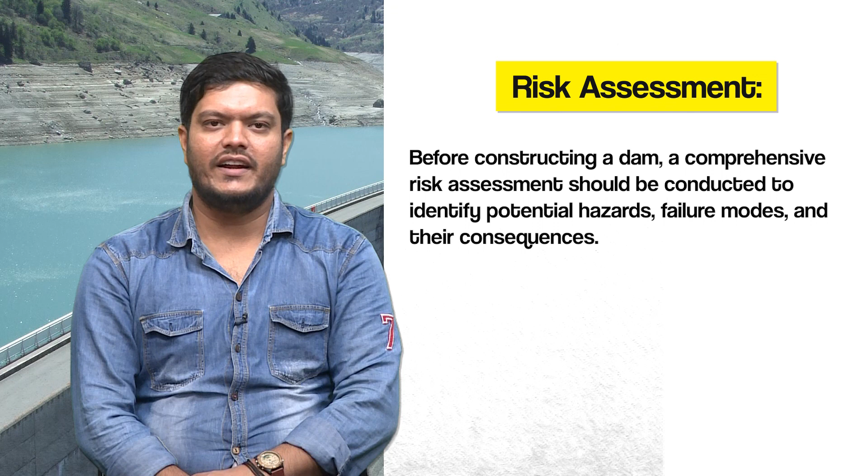Safety in dams: Risk assessment. Before constructing a dam, a comprehensive risk assessment should be conducted to identify potential hazards, failure modes, and their consequences. Risk assessment in dams is a systematic process that evaluates potential hazards, identifies possible failure modes, and assesses the associated risk to ensure the safety and integrity of the dam. It involves evaluating various factors to make informed decisions regarding dam design, operation, and emergency preparedness.

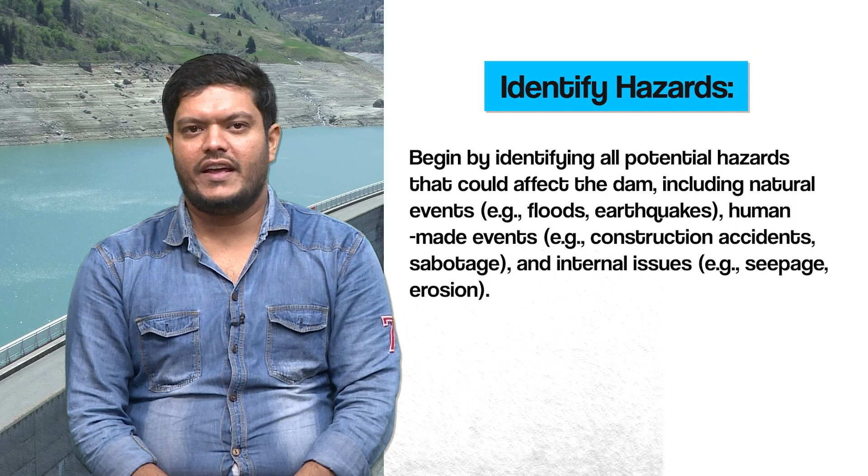Here are the key steps involved in risk assessment for dams. Identify hazards: begin by identifying all potential hazards that could affect the dam, including natural events such as floods and earthquakes, human-made events such as construction accidents or sabotage, and internal issues such as seepage or erosion.

Consequence analysis: determine the potential consequence of each identified hazard. This involves assessing the impact on human life, property, and the environment if the dam were to fail, considering factors such as downstream population, infrastructure, and ecological sensitivity.

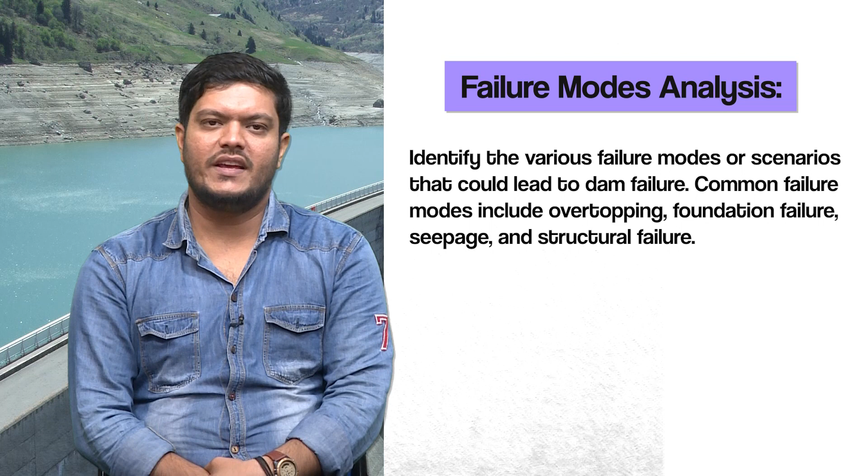Failure modes analysis: identify the various failure modes or scenarios that could lead to dam failure. Common failure modes include overtopping, foundation failure, seepage, and structural failure.

Probability assessment: evaluate the likelihood or probability of each failure mode occurring. Consider historical data, geological studies, meteorological data, and engineering analysis to estimate the probability of each hazard scenario.

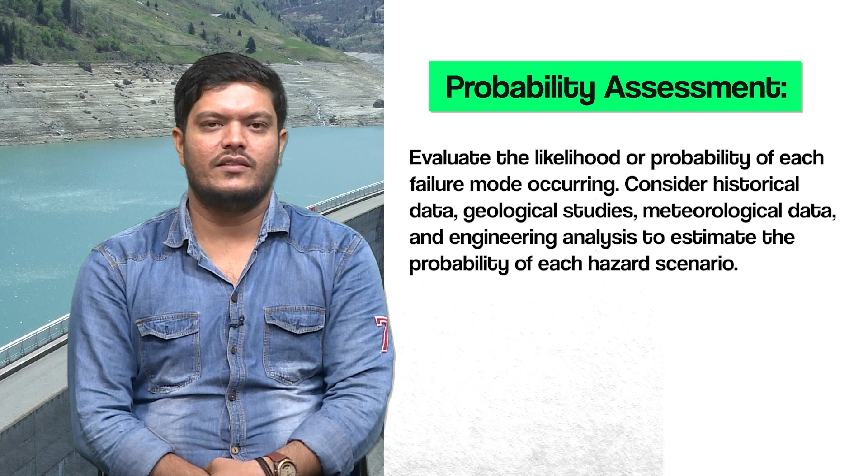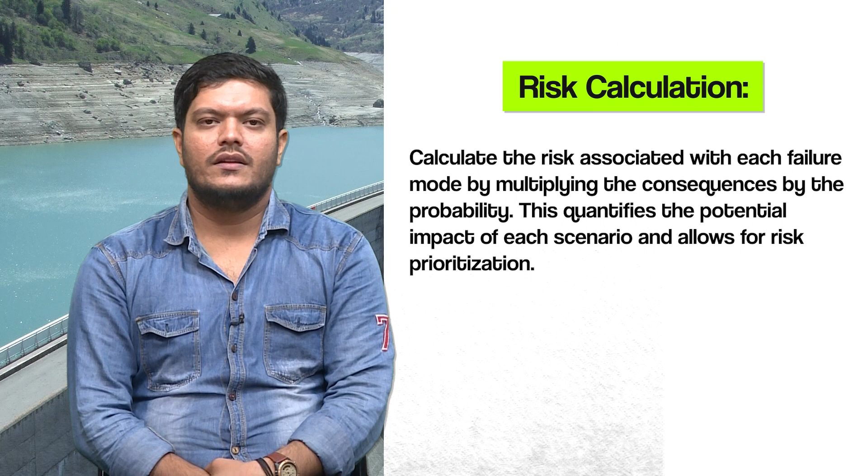Risk calculation: calculate the risk associated with each failure mode by multiplying the consequences by the probability. This quantifies the potential impact of each scenario and allows for risk prioritization.

Risk ranking: rank the failure modes based on their calculated risk levels. This helps prioritize which scenarios should be addressed first in terms of risk reduction measures.

Risk mitigation measures: develop and implement risk mitigation measures to reduce the probability of high risk scenarios and minimize their potential consequences. Mitigation measures may include dam design modifications, structural improvements, early warnings, and emergency response plans.

Emergency Action Plans (EAP): develop a comprehensive Emergency Action Plan that outlines specific actions to be taken in the event of a dam failure or high risk situation. Ensure that the EAP is well communicated to relevant authorities and the public.

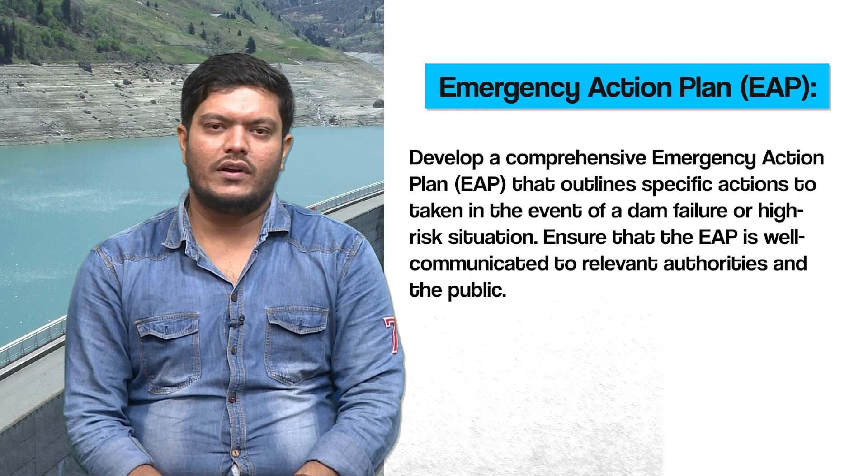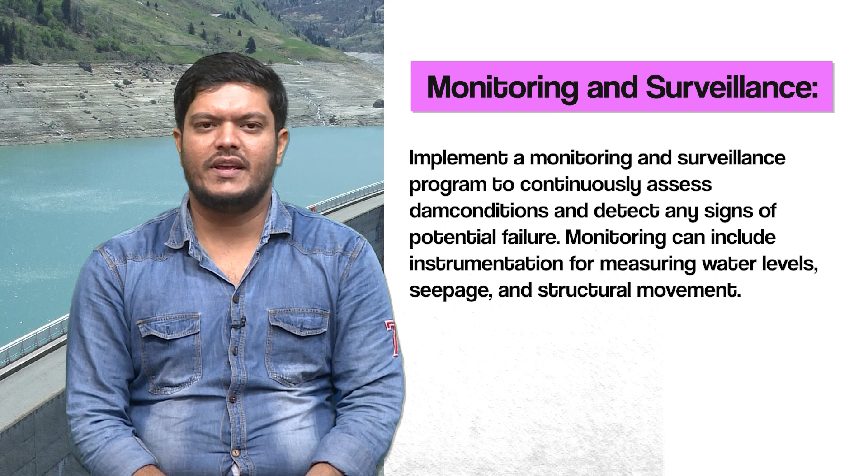Monitoring and surveillance: implement a monitoring and surveillance program to continuously assess dam condition and detect any signs of potential failure. Monitoring can include instrumentation for measuring water levels, seepage, and structural movement.

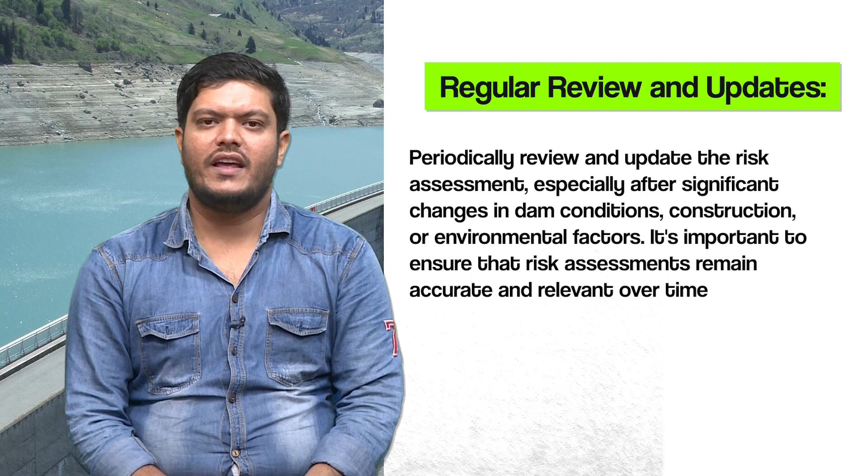Regular review and updates: periodically review and update the risk assessment, especially after significant changes in dam conditions, construction, or environmental factors. It's important to ensure that risk assessments remain accurate and relevant over time.

Community engagement: engage with the local community and stakeholders to keep them informed about dam safety measures, potential risks, and emergency response procedures. Public awareness is crucial for a coordinated response in case of emergencies.

Regulatory compliance: ensure that the dam complies with all relevant dam safety regulations and guidelines established by government agencies.

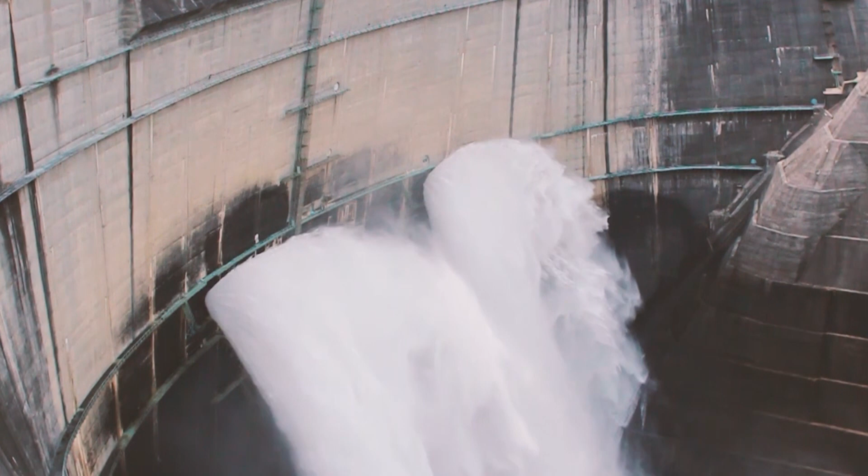Risk assessment in dams is an ongoing process that requires collaboration between dam owners, engineers, geologists, hydrologists, and emergency management agencies. By identifying and mitigating potential risks, dam safety can be enhanced, reducing the likelihood of catastrophic dam failures and protecting downstream communities and the environment.

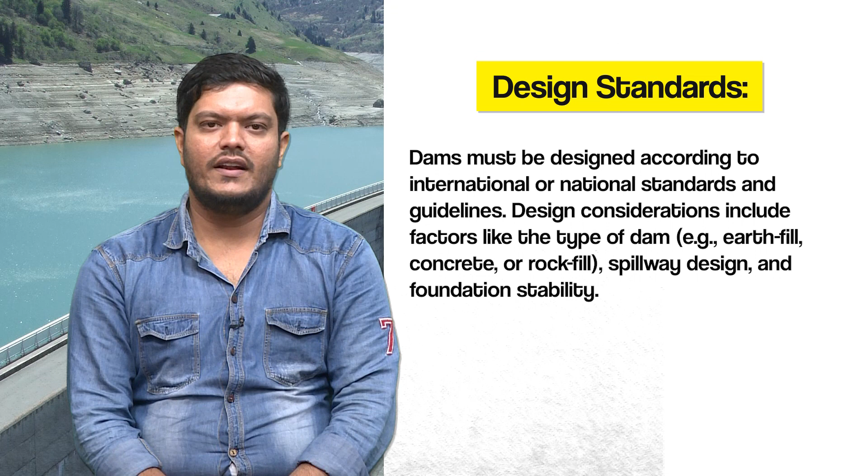Design standards: dams must be designed according to international or national standards and guidelines. Design considerations include factors like the type of dam - earth fill, concrete or rock fill - spillway design, and foundation stability. Design standards for dams are crucial to ensure the safe and reliable construction of these critical infrastructure elements.

These standards provide guidelines, specifications, and criteria that engineers and dam designers must adhere to when planning, designing, and constructing dams. Below are some of the key standards and considerations for dams.

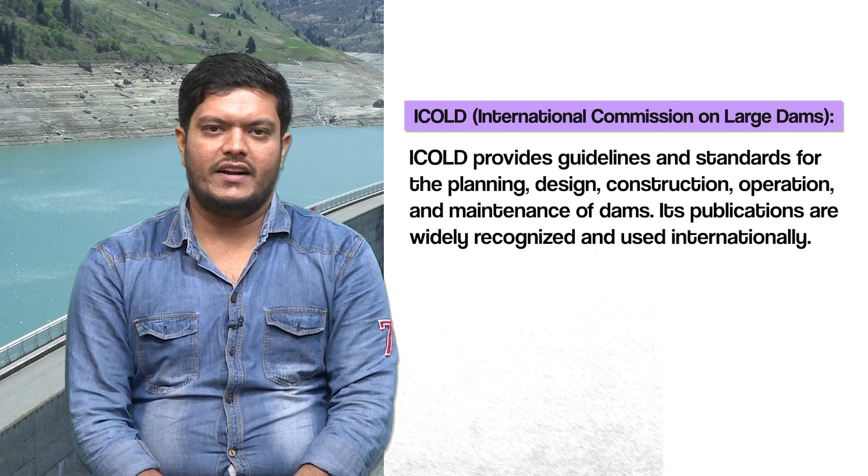International guidelines and standards: ICOLD, the International Commission on Large Dams, provides guidelines and standards for the planning, designing, construction, operation, and maintenance of dams. Its publications are widely recognized and used internationally.

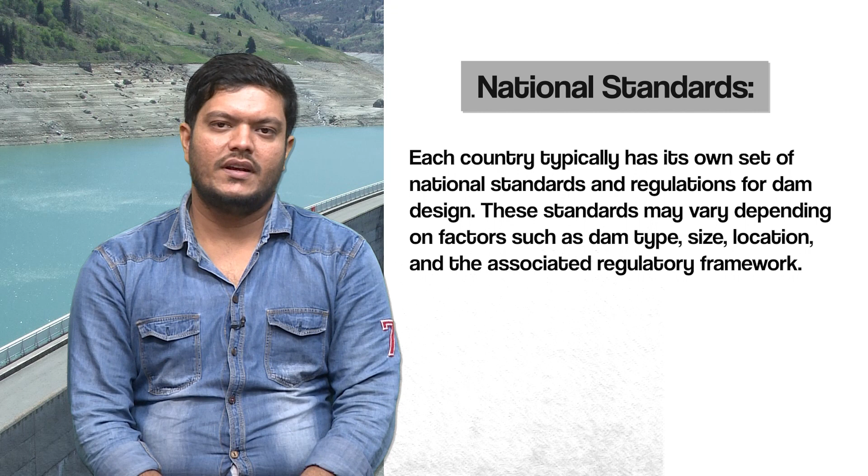National standards: each country typically has its own set of national standards and regulations for dam designs. These standards may vary depending on factors such as dam type, size, location, and the associated regulatory framework.

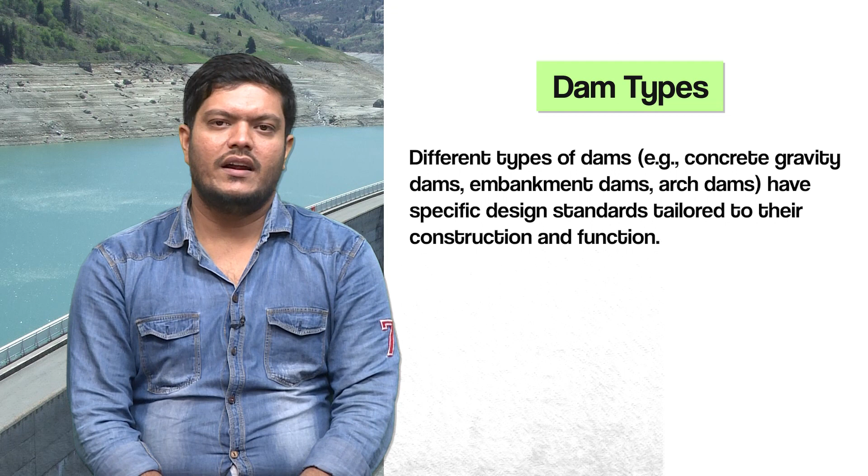Dam types. Different types of dams, for example concrete gravity dams, embankment dams, and arch dams, have specific design standards tailored to their construction and function. Next is geotechnical considerations.

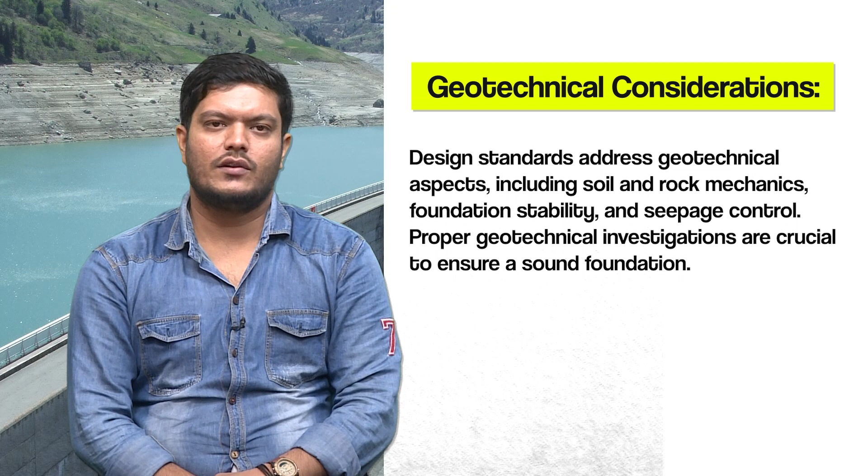Design standards address geotechnical aspects including soil and rock mechanics, foundation stability, and seepage control. Proper geotechnical investigations are crucial to ensure a sound foundation.

Hydraulic design standards cover spillway design, outlet works, and flood routing. They ensure that the dam can safely manage inflows, floods, and reservoir operations.

Structural design standards focus on the structural integrity of the dam, including factors like materials, reinforcement, and structural safety. These standards are essential for concrete dams and other structural elements.

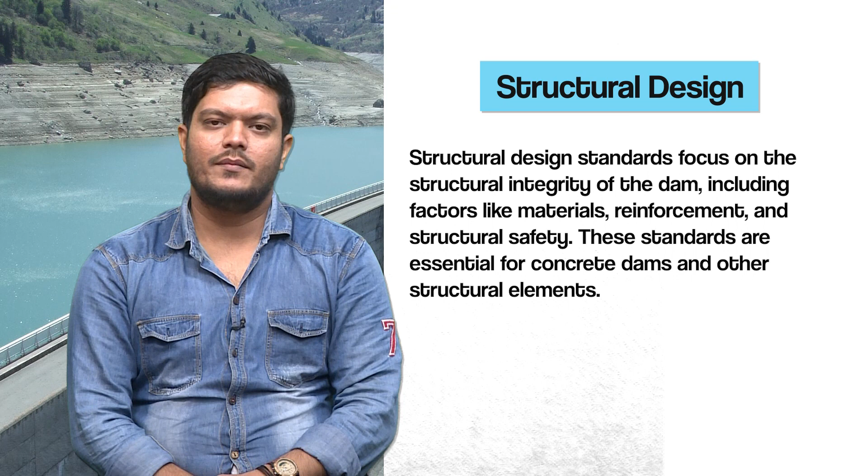Hydrological standards specify how to estimate inflows, design flood events, and determine reservoir operating rules. Accurate hydrological data is crucial for dam design.

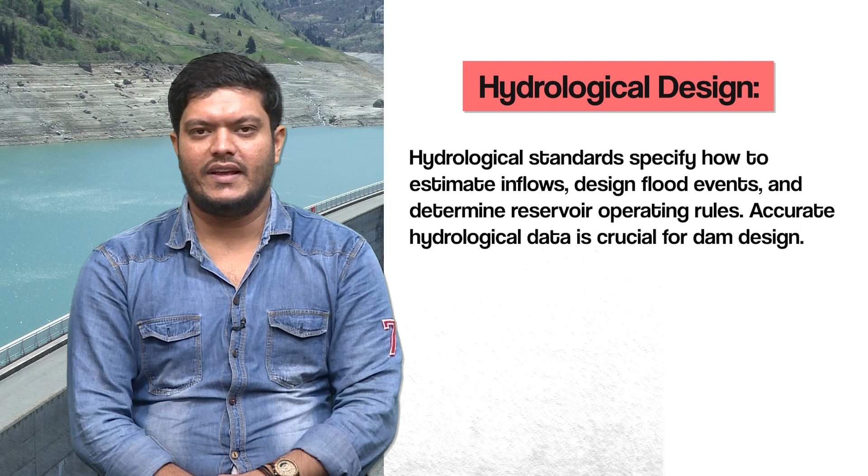Environmental considerations. Modern dam design standards also emphasize environmental aspects including fish passage, habitat preservation, and minimizing the ecological impact of the dam.

Safety factors. Design standards include safety factors to account for uncertainties in materials, construction, and loading conditions. These factors provide an additional margin of safety.

Instrumentation and monitoring. Design standards often require the installation of instrumentation to monitor dam performance continuously. This includes sensors for water level, seepage, and dam movement.

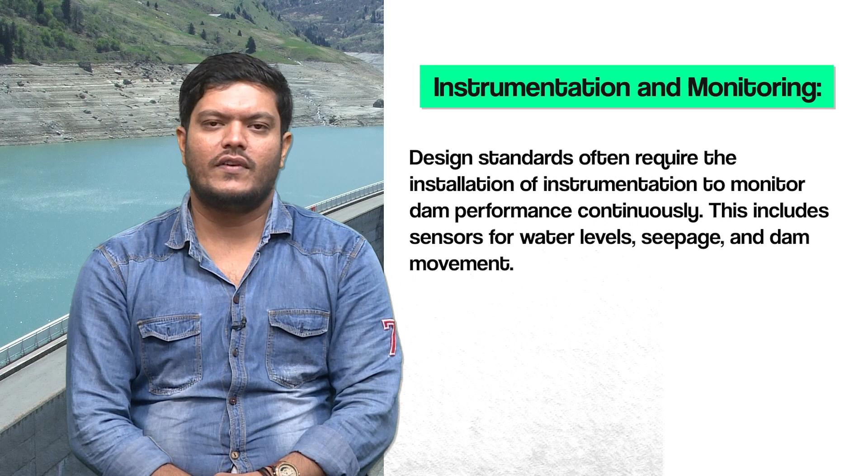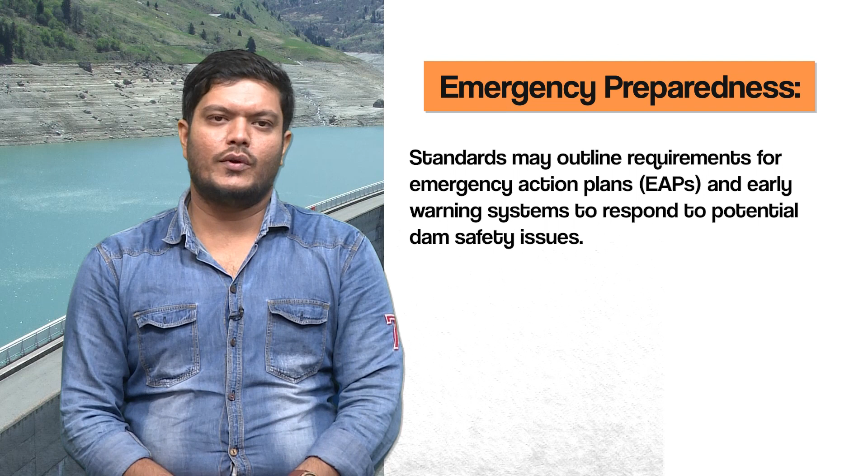Emergency preparedness. Standards may outline requirements for emergency action plans (EAPs) and early warning systems to respond to potential dam safety issues.

Construction specification. Construction standards and specifications define the methods and quality control procedures that must be followed during dam construction.

Operation and maintenance. Design standards may include guidelines for ongoing dam operations and maintenance to ensure the safety and integrity of the structure throughout its lifespan.

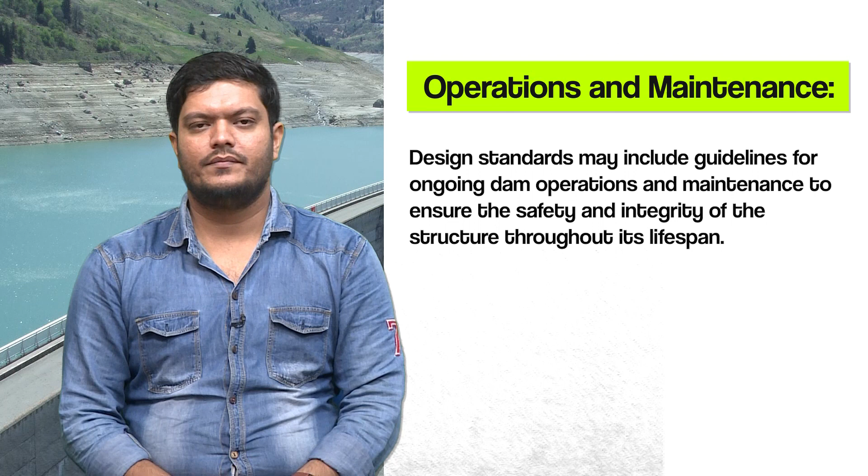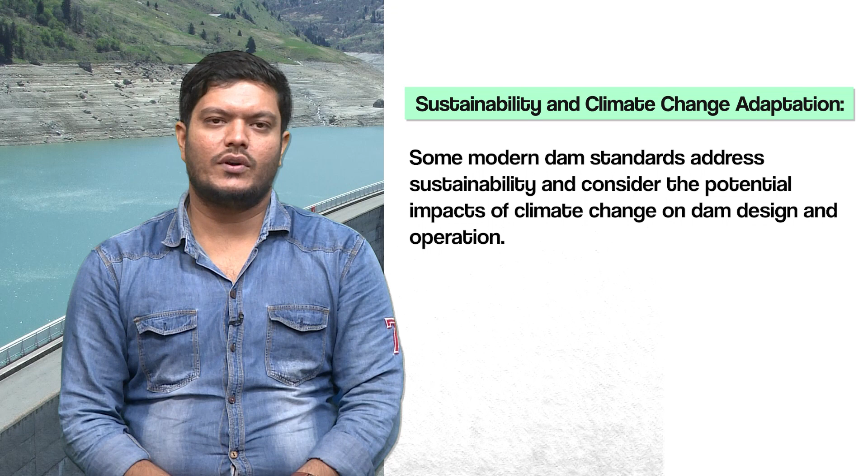Sustainability and climate change adaptations. Some modern dam standards address sustainability and consider the potential impacts of climate change on dam design and operation.

Engineers and dam designers must stay up to date with the latest design standards and guidelines, as they may evolve over time to incorporate new technologies, research findings, and safety measures.

Compliance with these standards is essential to ensure the safety and long-term functionality of dams, as well as to meet regulatory requirements and protect downstream communities and the environment.

Emergency preparedness. A well-defined emergency action plan (EAP) should be in place to address various failure scenarios. It should include evacuation procedures, warning systems, and communication strategies.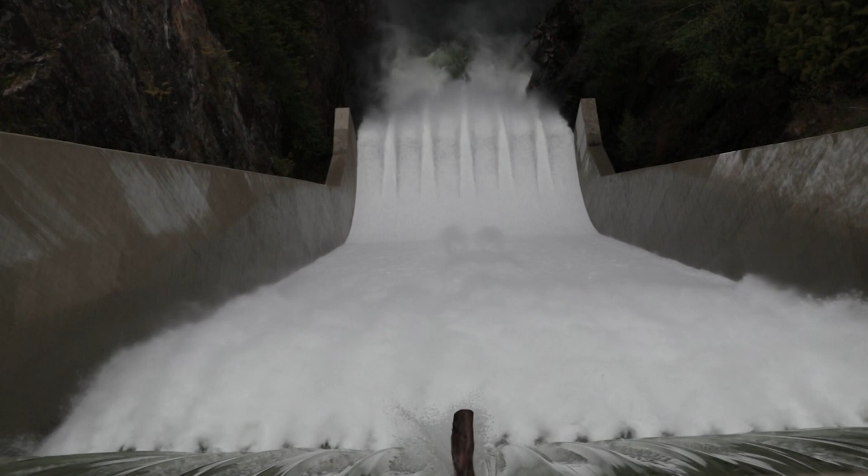Climate change adaptation in dams is a critical aspect of dam management and design. In the face of shifting climate patterns, increasing extreme weather events, and rising global temperatures, dams play a crucial role in managing water resources, mitigating floods, and providing a stable water supply.

Adapting dams to climate change is essential to ensure their continued effectiveness and safety. Here are some key considerations for climate change adaptation in dams.

Hydrological modeling. Re-evaluate hydrological models and data to incorporate climate change projections. This includes assessing potential changes in precipitation patterns, runoff, and stream flow, which can impact reservoir management and flood control.

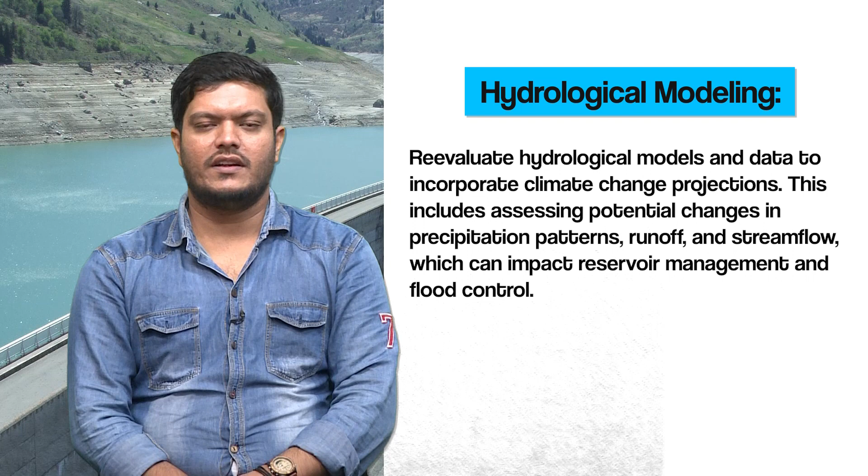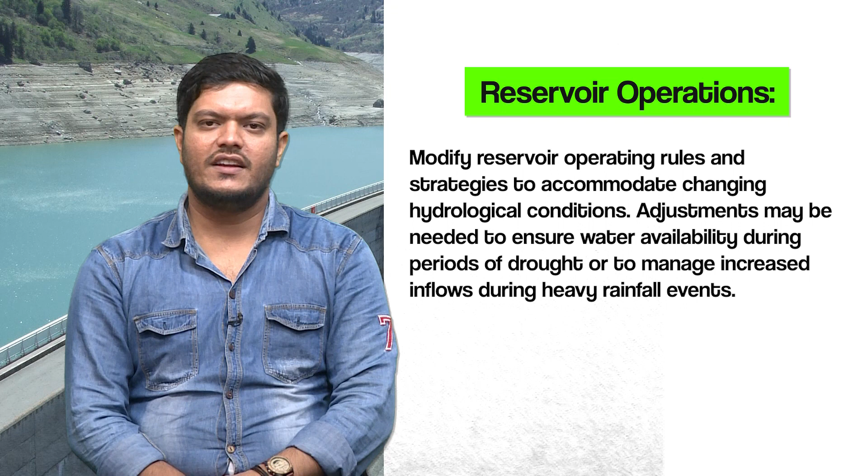Reservoir operations. Modify reservoir operating rules and strategies to accommodate changing hydrological conditions. Adjustments may be needed to ensure water availability during periods of drought or to manage increased inflows during heavy rainfall events.

Emergency preparedness. Update and enhance emergency action plans (EAPs) to account for climate change risks such as more frequent and severe storms, prolonged droughts, and increased flood risk. Ensure that EAPs are communicated effectively to downstream communities.

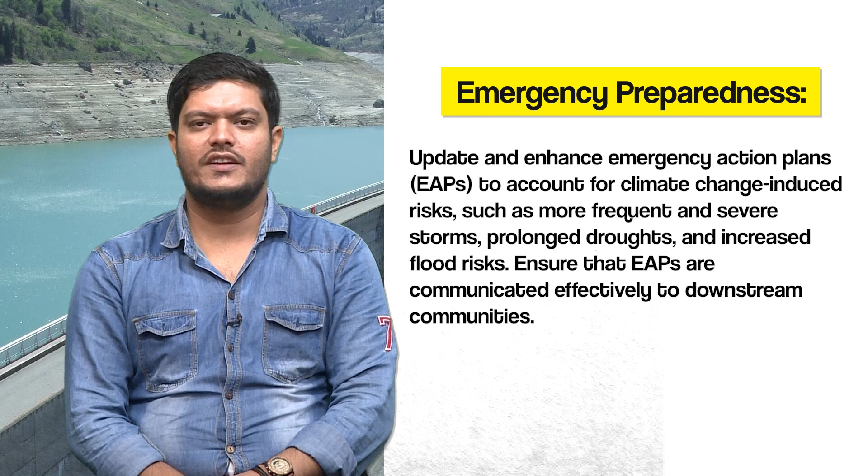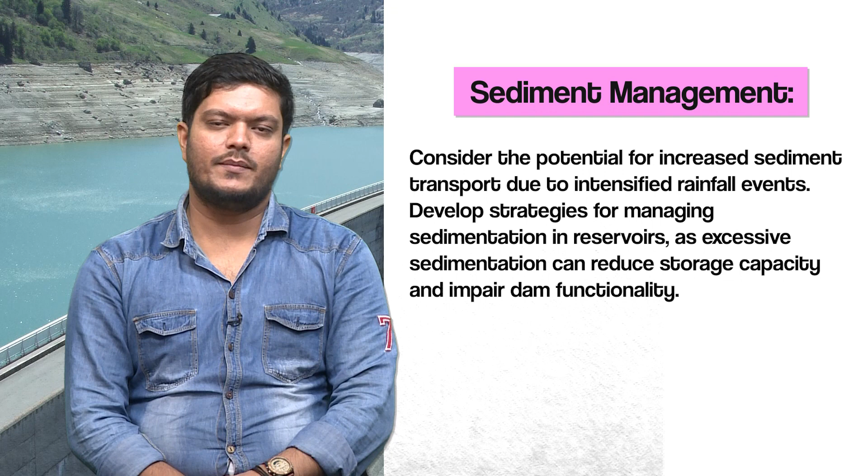Sediment management. Consider the potential for increased sediment transport due to intensified rainfall events. Develop strategies for managing sedimentation in reservoirs, as excessive sedimentation can reduce storage capacity and impair dam functionality.

Seepage control. Evaluate seepage control measures to account for changing groundwater conditions resulting from altered precipitation patterns. Enhance seepage monitoring and implement additional measures if necessary to maintain dam integrity.

Structural resilience. Assess the resilience of dam structures to extreme weather events including increased wind loads, intense rainfall, and temperature fluctuations. Reinforce dam infrastructure as needed to withstand these conditions.

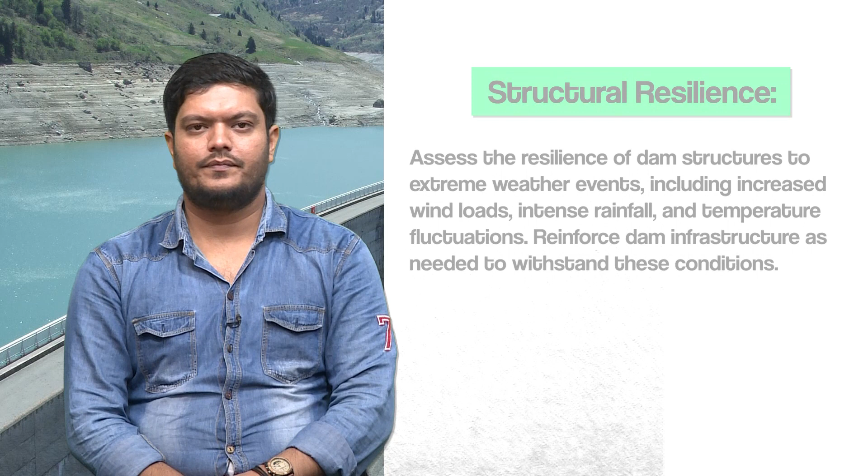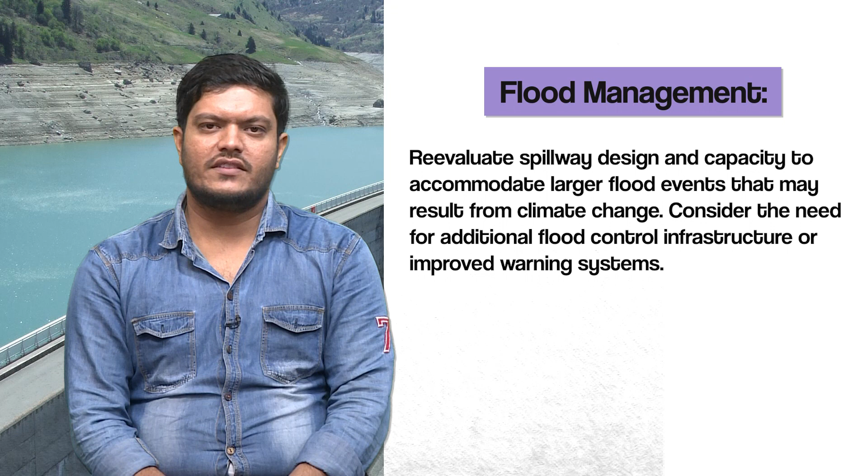Flood management. Reevaluate spillway design and capacity to accommodate larger flood events that may result from climate change. Consider the need for additional flood control infrastructure or improved warning systems.

Water quality. Monitor and manage water quality in reservoirs as climatic change can impact temperature regimes and nutrient levels. Changes in water quality can affect aquatic ecosystems and downstream users.

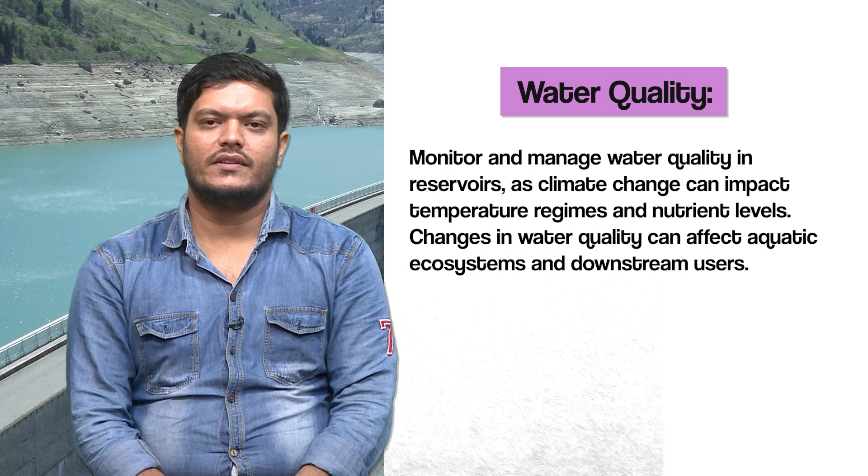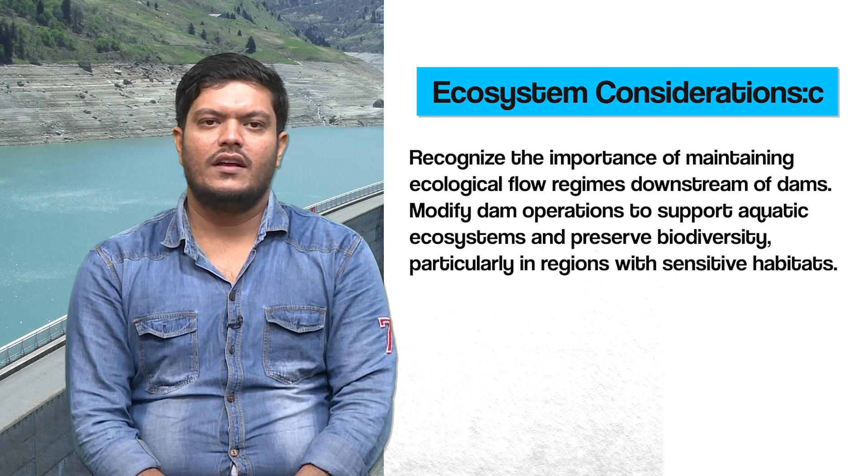Ecosystem considerations. Recognize the importance of maintaining ecological flow regimes downstream of dams. Modify dam operations to support aquatic ecosystems and preserve biodiversity, particularly in regions with sensitive habitats.

Community engagement. Involve local communities and stakeholders in the adaptation process. Share information about climate change risk, potential impact on dam operations, and measures taken to enhance safety and resilience.

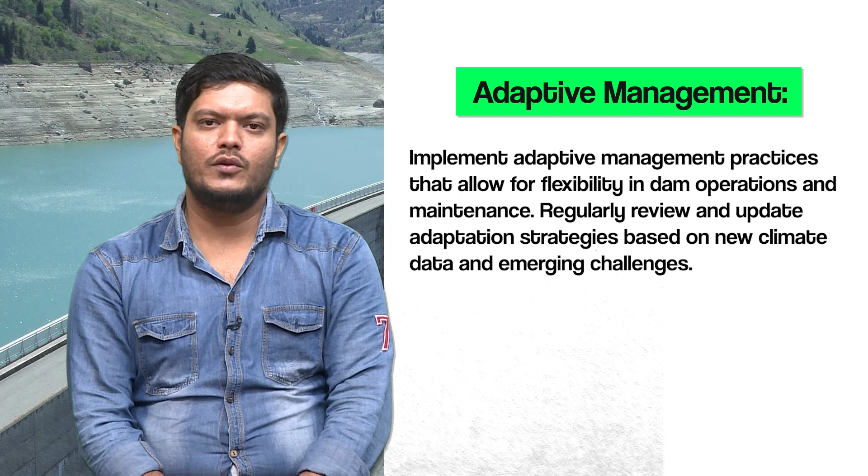Adaptive management. Implement adaptive management practices that allow for flexibility in dam operations and maintenance. Regularly review and update adaptation strategies based on new climate data and emerging challenges.

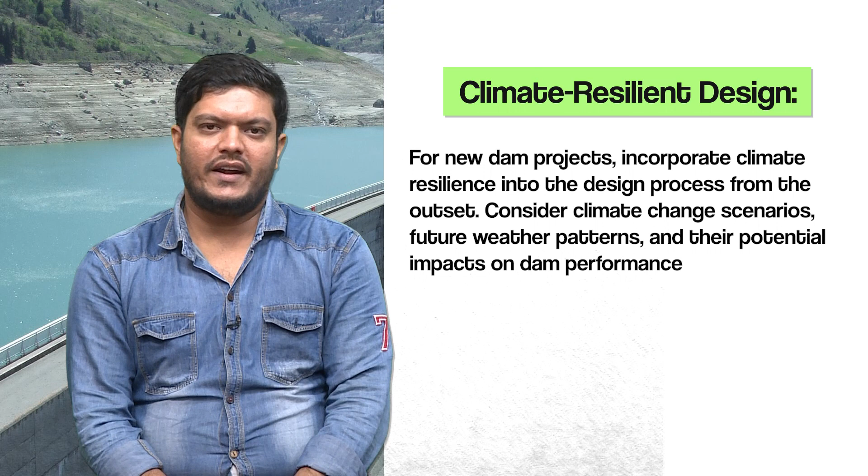Climate resilient design. For new dam projects, incorporate climate resilience into the design process from the outset. Consider climate change scenarios, future weather patterns, and their potential impacts on dam performance.

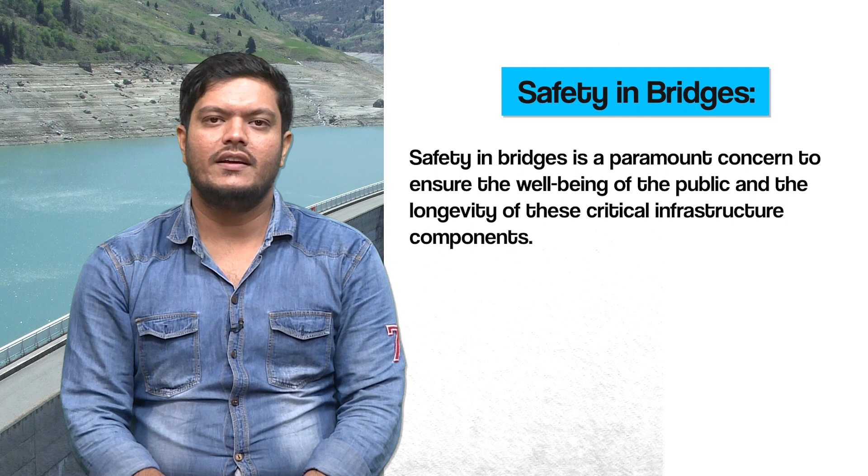Safety in bridges. Safety in bridges is a paramount concern to ensure the well-being of the public and the longevity of these critical infrastructure components.

Design codes. Bridges should be designed and constructed according to relevant design codes and standards. These standards cover materials, load bearing capacities, and safety factors.

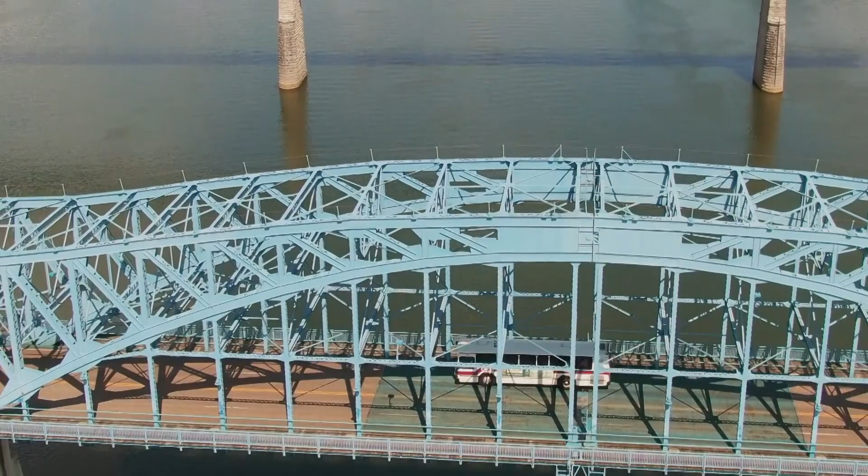Design codes for bridges are a set of guidelines, standards, and specifications that engineers and designers must adhere to when planning, designing, and constructing bridges. These codes ensure the safety, durability, and functionality of bridges, as well as compliance with legal and regulatory requirements.

Design codes for bridges can vary by country and region, but there are several widely recognized international codes and standards that are commonly used. Here are some of the notable design codes for bridges.

AASHTO LRFD Bridge Design Specifications, United States. The American Association of State Highway and Transportation Officials AASHTO LRFD, Load and Resistance Factor Design, bridge design specifications are widely used in the United States for the design and evaluation of highway bridges.

Eurocodes, European Union. The Eurocodes are a series of European standards that cover the design of civil engineering structures including bridges. Eurocode 2 (EC2) focuses on concrete structures, while Eurocode 3 (EC3) covers steel structures. Different parts of the Eurocodes deal with various aspects of bridge design.

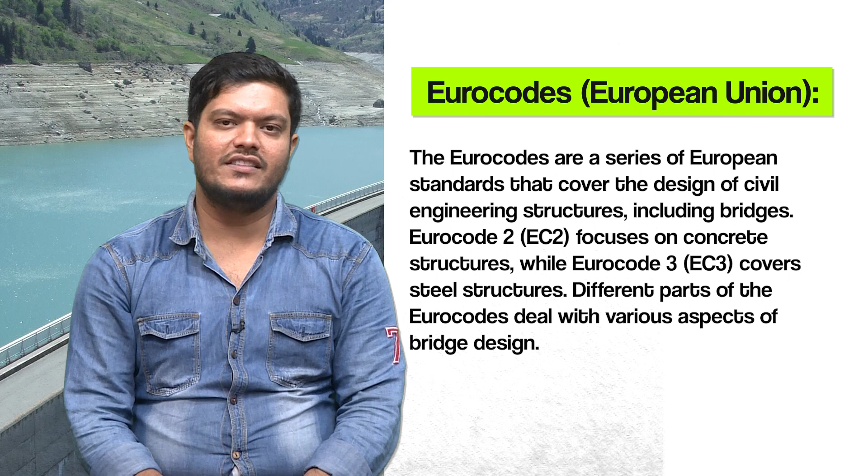BS 5400, United Kingdom. British Standard 5400 provides design guidelines for steel, concrete, and composite bridges in the United Kingdom. It covers various aspects of bridge design including materials, loading, and construction.

CAN/CSA S6, Canada. The Canadian Highway Bridge Design Code, CAN/CSA S6, is used for the design, evaluation, and rehabilitation of highway bridges in Canada. It addresses both concrete and steel structures.

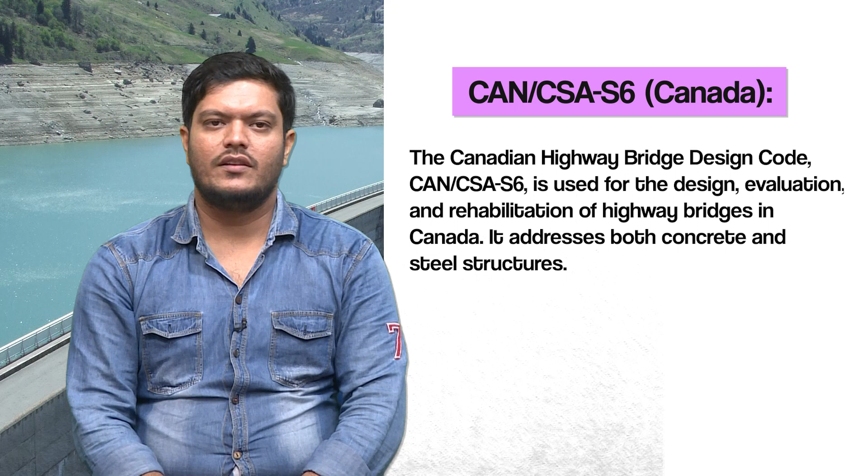AS 5100, Australia. The Australian standard AS 5100 covers the design of road bridges and other related structures in Australia. It provides guidelines for the design of various types of bridges and their components.

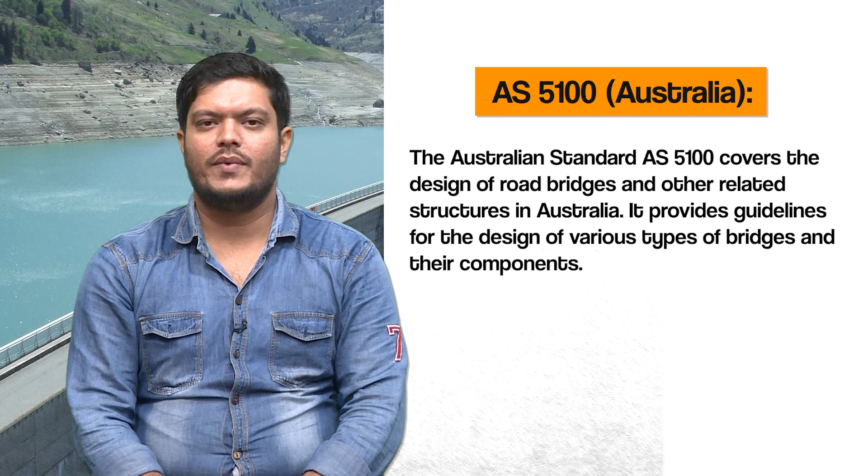Indian Road Congress IRC codes, India. The Indian Road Congress has published a series of codes and guidelines for the design and construction of bridges in India. These codes cover a wide range of aspects, from materials to foundation design.

Japanese Industrial Standards JIS, Japan. Japan has its own set of standards for bridge design, published under the Japanese Industrial Standards JIS system. These standards cover material, structural design, and construction practices.

ISO, International Organization for Standardization. ISO standards related to bridges cover various aspects including bridge management systems, bridge inspection, and bridge load rating. These standards are applicable internationally.

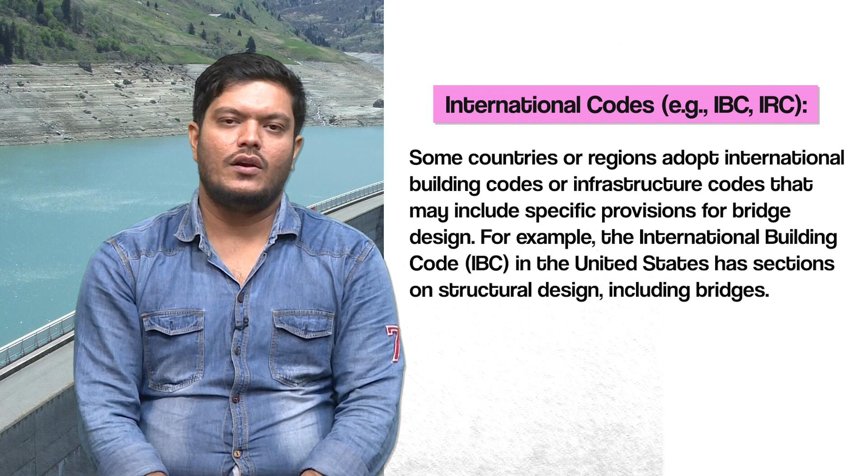International codes, for example IBC, IRC. Some countries or regions adopt international building codes or infrastructure codes that may include specific provisions for bridge design. For example, the International Building Code (IBC) in the United States has a section on structural design including bridges.

Local regulations. In addition to national or international codes, local authorities and municipalities have their own specific regulations and standards that bridge designers must adhere to.

It's essential for engineers and designers to consult the relevant design codes and standards that apply to their specific project, location, and type of bridge. These codes are periodically updated to reflect advances in engineering practices and materials, so it's crucial to use the most current versions and stay informed about revisions or amendments. Compliance with design codes helps ensure the safety and reliability of bridges while providing a basis for regulatory approval.

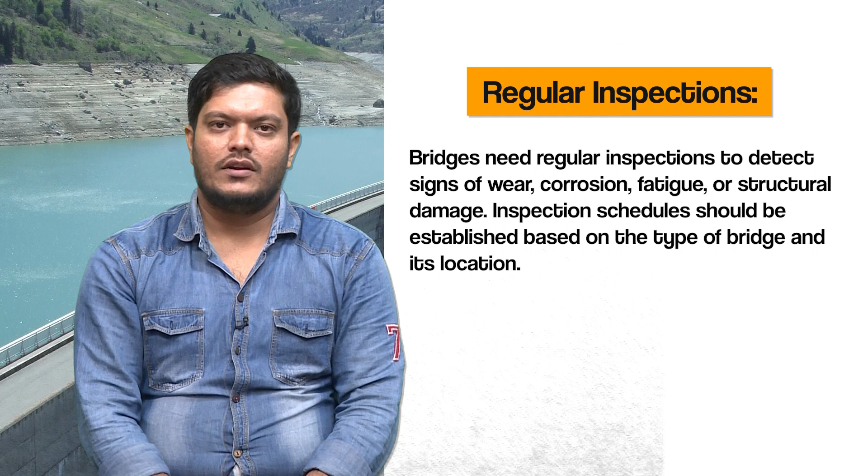Regular inspections: bridges need regular inspection to detect signs of wear, corrosion, fatigue, or structural damage. Inspection schedules should be established based on the type of bridge and its location.

Maintenance: routine maintenance including cleaning, painting, and repairing should be carried out to prevent deterioration. Maintenance activities should be documented and tracked.

Upgrading and rehabilitation: older bridges may need upgrading or rehabilitation to meet current safety standards. This can involve strengthening the structure or replacing key components.

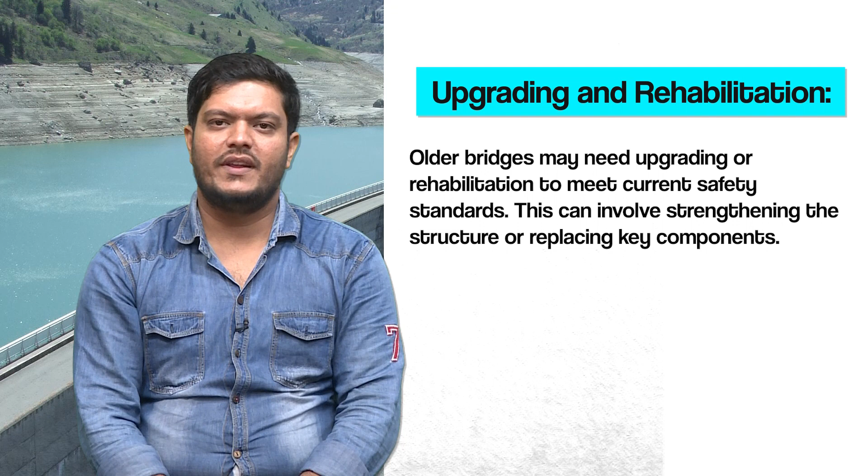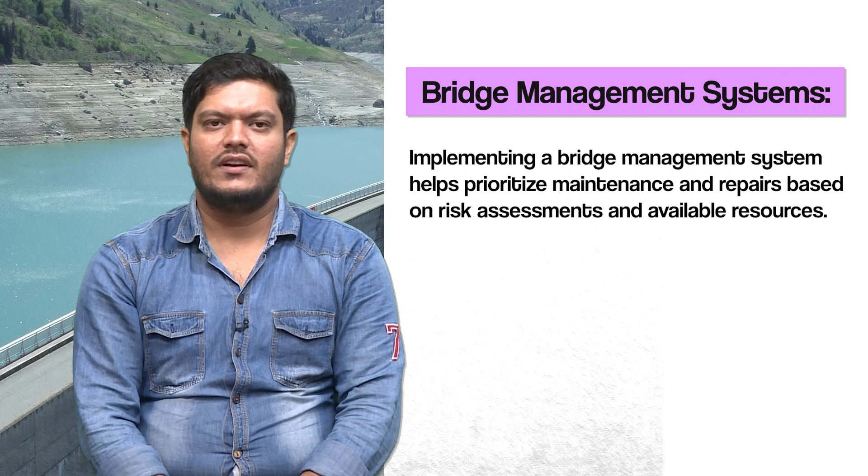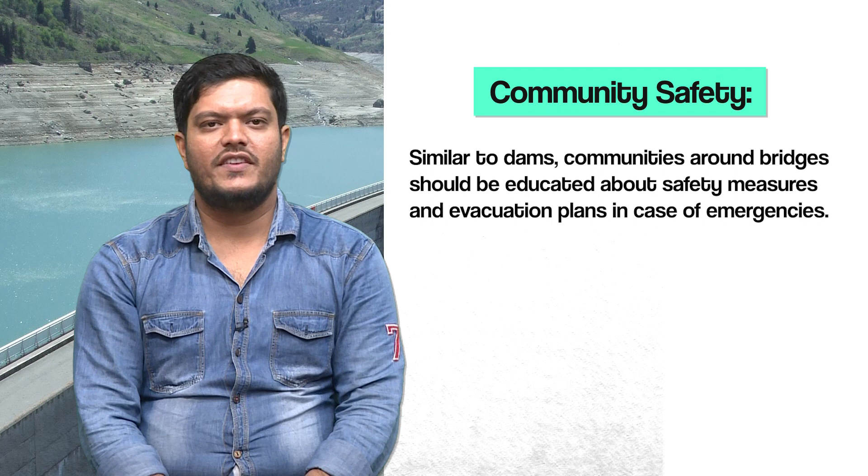Bridge management systems: implementing a bridge management system helps prioritize maintenance and repairs based on risk assessment and available resources. Community safety: similar to dams, communities around bridges should be educated about safety measures and evacuation plans in case of emergencies.

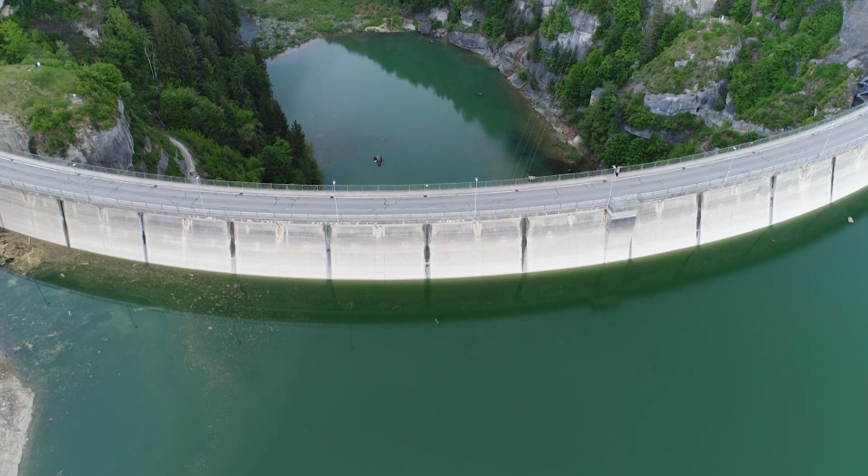In regions prone to earthquakes, bridges should be designed to withstand seismic forces. Retrofitting existing bridges may also be necessary for seismic safety.

Seismic considerations in bridge design and construction are of paramount importance, especially in regions prone to earthquakes. Earthquake-resistant design practices aim to minimize damage to bridges and ensure the safety of users during seismic events. Here are the key seismic considerations for bridges.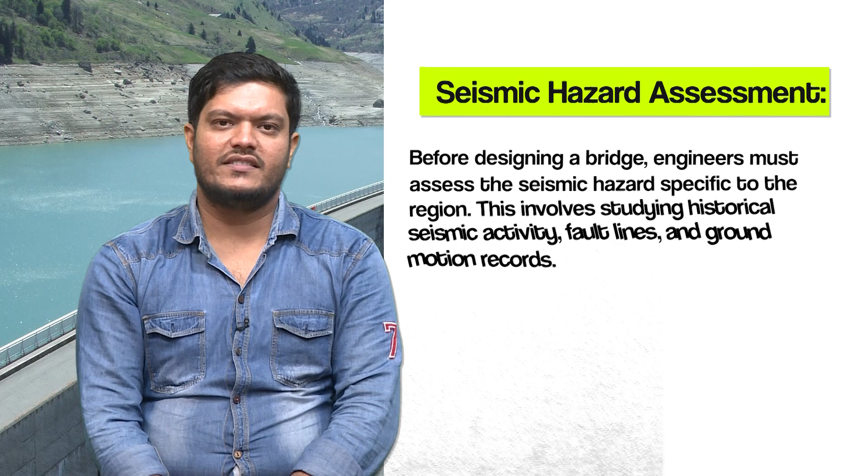Seismic hazard assessment: before designing a bridge, engineers must assess the seismic hazard specific to the region. This involves studying historical seismic activity, fault lines, and ground motion records. Seismic hazard maps and probabilistic seismic hazard analysis (PSHA) are used to quantify the level of ground shaking expected at the bridge site.

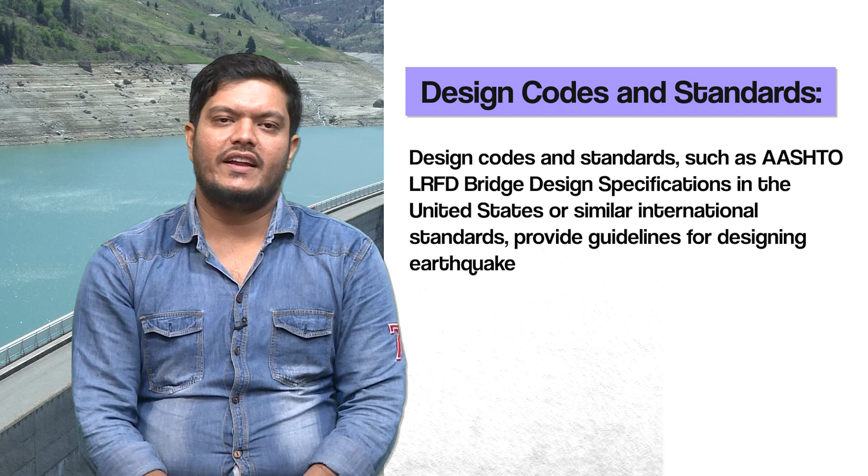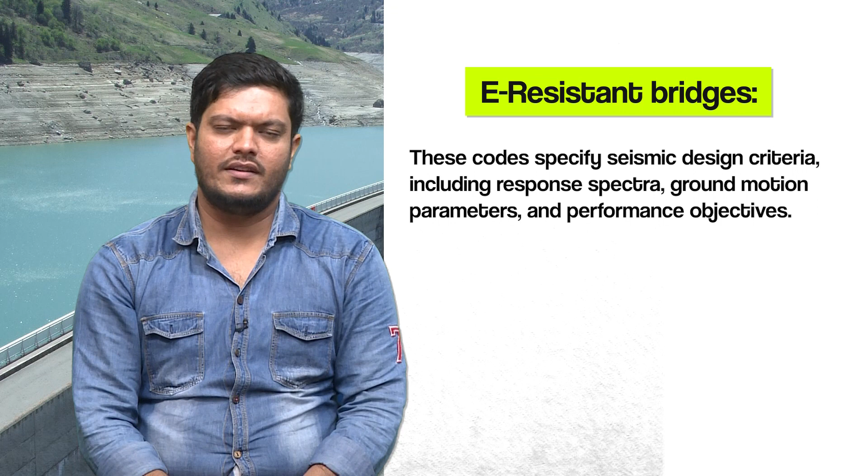Design codes and standards, such as AASHTO LRFD bridge design specifications in the United States or similar international standards, provide guidelines for designing earthquake-resistant bridges. These codes specify seismic design criteria including response spectra, ground motion parameters, and performance objectives. Engineers must select appropriate seismic design parameters such as the design earthquake magnitude and ground motion response spectra based on the hazard assessment.

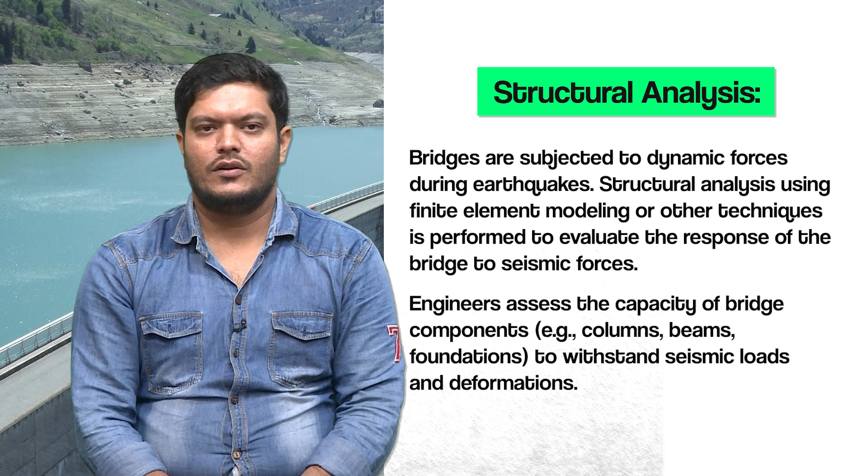Structural analysis: bridges are subjected to dynamic forces during earthquakes. Structural analysis using finite element modeling or other techniques is performed to evaluate the response of the bridge to seismic forces. Engineers assess the capacity of bridge components, such as columns, beams, and foundations, to withstand seismic loads and deformations.

Ductility and redundancy: seismic-resistant bridge design often incorporates ductility and redundancy. Ductility allows the bridge to absorb energy during an earthquake without collapsing, while redundancy ensures alternative load paths if one component fails. Foundation design: proper foundation design considers soil-structure interaction and ensures that the foundation system can resist seismic forces. Deep foundations may be required in some cases to reach stable soil or bedrock.

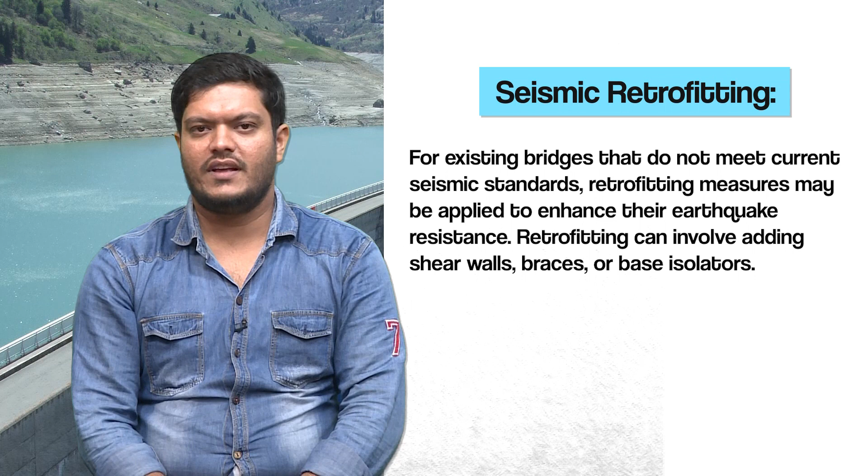Seismic retrofitting: for existing bridges that do not meet current seismic standards, retrofitting measures may be applied to enhance their earthquake resistance. Retrofitting can involve adding shear walls, braces, or base isolators. Seismic joints: bridge expansion joints and bearings must be designed to accommodate seismic movements and deformations. Seismic joints allow the bridge to move during an earthquake while maintaining its integrity.

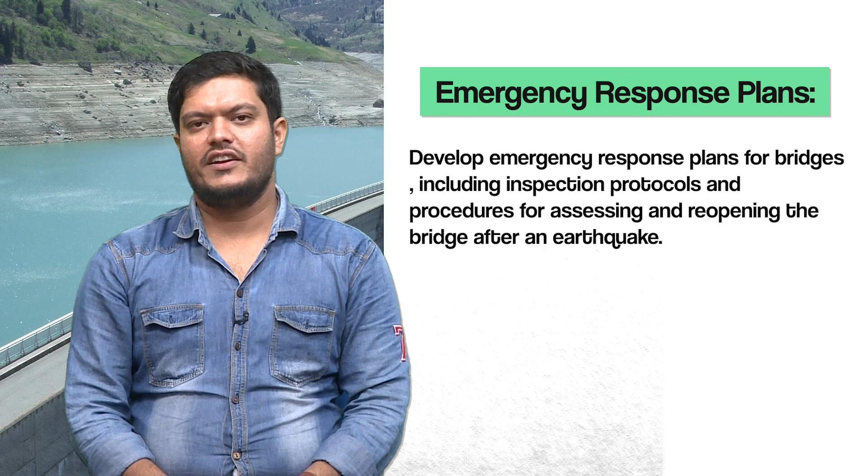Post-earthquake inspection and repair: after a seismic event, bridges should be inspected for damage. Any necessary repairs or maintenance should be carried out promptly to restore functionality. Emergency response plans: develop emergency response plans for bridges, including inspection protocols and procedures for assessing and reopening the bridge after an earthquake.

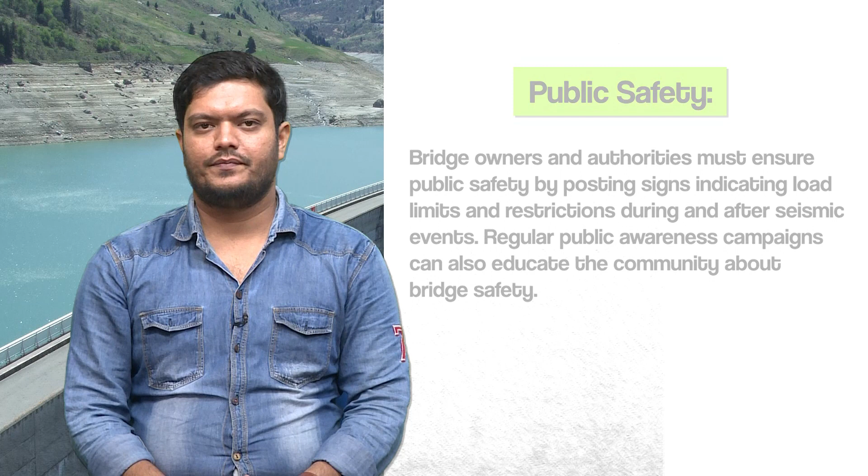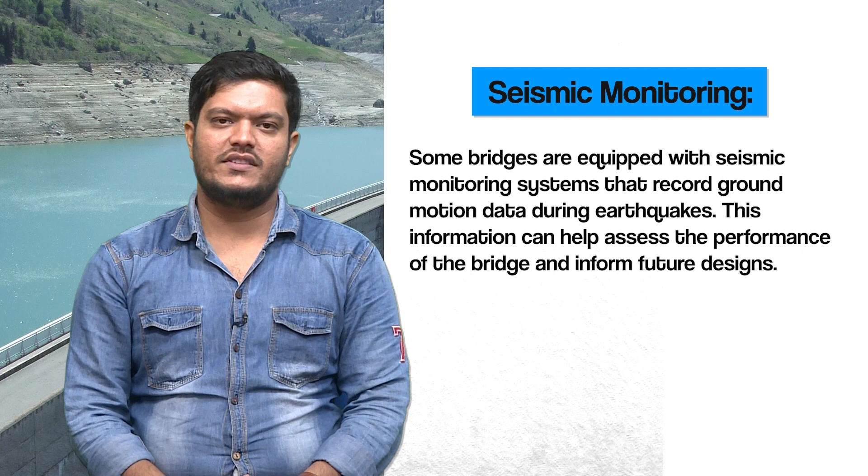Public safety: bridge owners and authorities must ensure public safety by posting signs indicating load limits and restrictions during and after seismic events. Regular public awareness campaigns can also educate the community about bridge safety. Seismic monitoring: some bridges are equipped with seismic monitoring systems that record ground motion data during earthquakes. This information can help assess the performance of the bridge and inform future designs.

Seismic considerations in bridge design are essential in protecting infrastructure, ensuring public safety, and maintaining transportation networks in earthquake-prone regions. Collaboration between structural engineers, geotechnical engineers, and seismologists is critical to designing and retrofitting bridges that can withstand seismic forces.

Conclusion: both dams and bridges are critical components of infrastructure, and their safety is a shared responsibility among government agencies, engineers, and the public. Regular maintenance, inspections, and adherence to safety standards are essential to ensure the continued safety and functionality of these structures. Thank you and have a nice day.